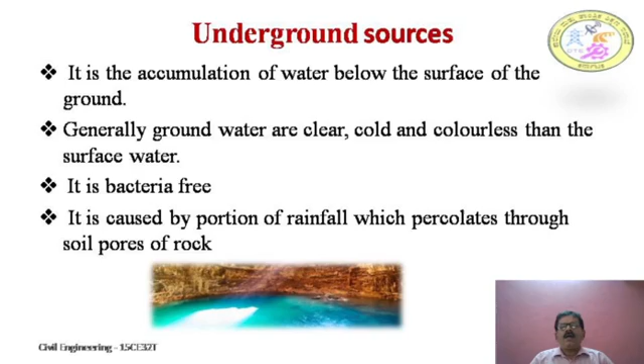Infiltration galleries. We know that groundwater travels towards lakes, rivers or streams. This traveling water can be intercepted by digging a trench or constructing a tunnel with holes on sides at right angles to the direction of flow of underground water.

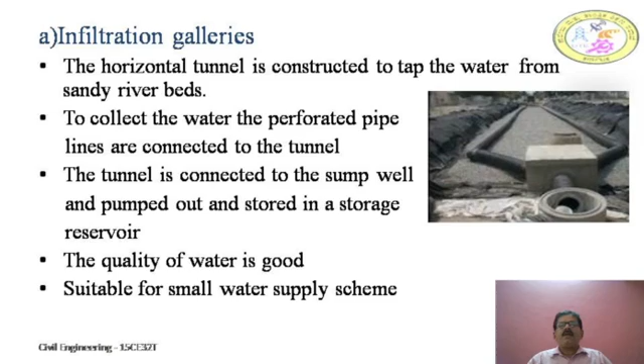For maximum yield, the galleries should be placed at the full depth of the aquifer. In this diagram, we can see the construction features of an infiltration gallery. Infiltration galleries may be constructed with masonry or concrete with weep holes of 5 cm to 10 cm.

Infiltration galleries are surrounded on sides and top with gravel or pebble stones to increase their intake capacity. A longitudinal slope is given to the galleries, and at the end a sump well is constructed. From the sump, collected water is pumped out and stored in a storage reservoir.

Here we can see the porous drains filled with loose material. Here water percolates and it goes to the infiltration gallery. The structure is constructed below the water table.

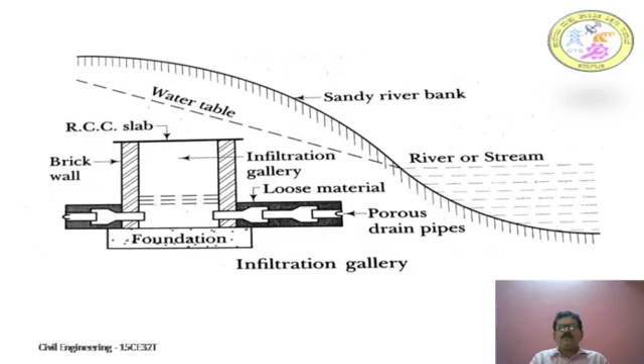Infiltration well. These are shallow wells constructed on the banks of rivers and nallas. These wells are very suitable for Indian conditions, where there are deposits of sand and porous material at least 3 meters deep in river beds. The water infiltrates through the bottom of these wells.

The water is tapped by a number of infiltration wells sunk in series in sandy river beds. The series of wells are connected to the jack well and from there pumped to the storage reservoir.

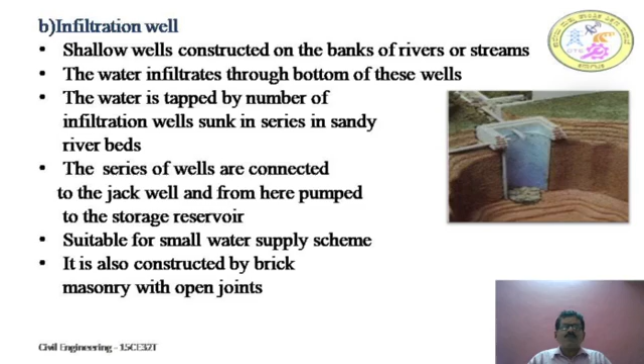This is the diagram of an infiltration well. This well is constructed by masonry wall with open joints. The top is covered by an RCC slab. The bottom is kept open to infiltrate the water

into the well. In the next diagram, you can see the porous pipes from infiltration wells connected to jack wells. From this jack well, the water is pumped out to the storage reservoir.

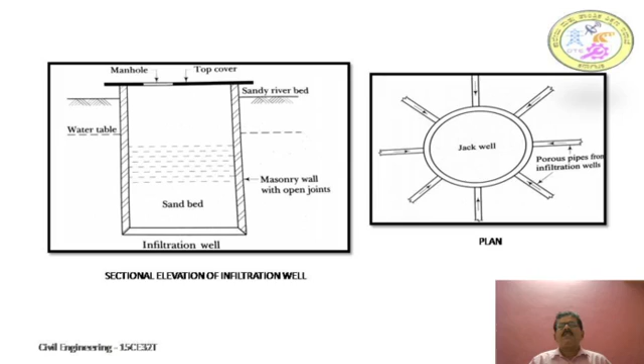Springs. Groundwater which reappears at the ground surface by percolation or underground pressure is called springs. Springs generally can supply a small quantity of water, hence these cannot be used as sources of water for big towns.

Well developed springs, when more numbers are combined together, can be used as water supply sources for small hill towns. The quality depends on geological formation as well as their locality.

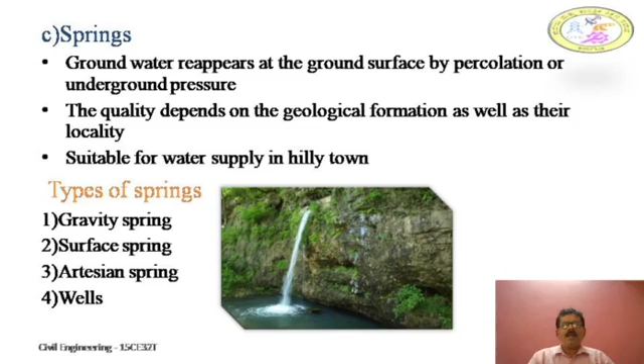Types of springs. First one is gravity spring, second one is surface spring, third one is artesian spring and wells. Gravity spring: the water table rises along the hill slope and water finds a path.

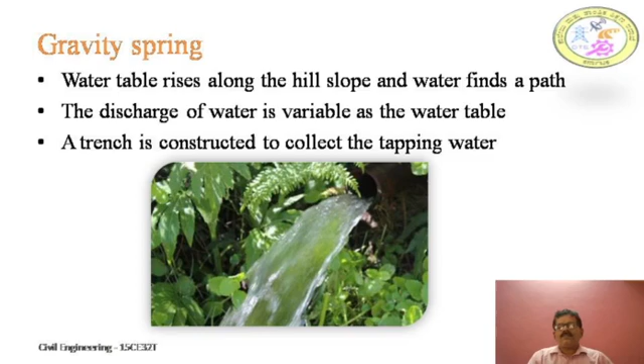Here we can see the diagram of gravity spring. The surface groundwater rises above the general level. This groundwater comes out from the weaker zone of the hill. The water from gravity spring is collected in trench.

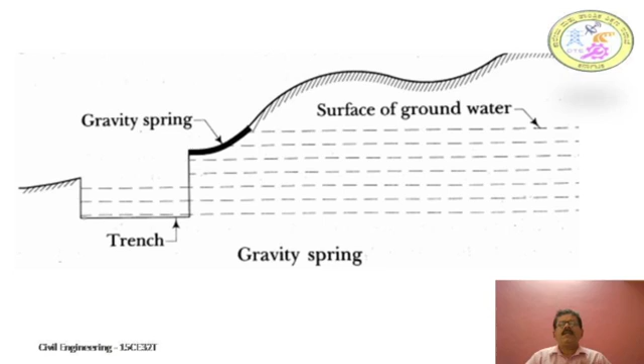Surface spring. It is the most common type of spring. This is formed when an impervious stratum which is supporting the groundwater reservoir outcrops, when subsoil water forms a storage due to the presence of an impervious layer in the form of a valley. A cut-off wall is constructed on the impervious layer to form a reservoir.

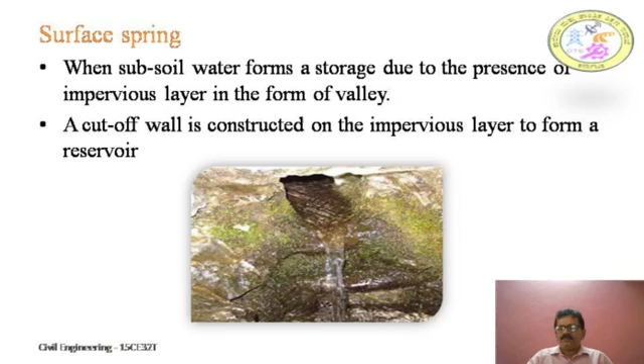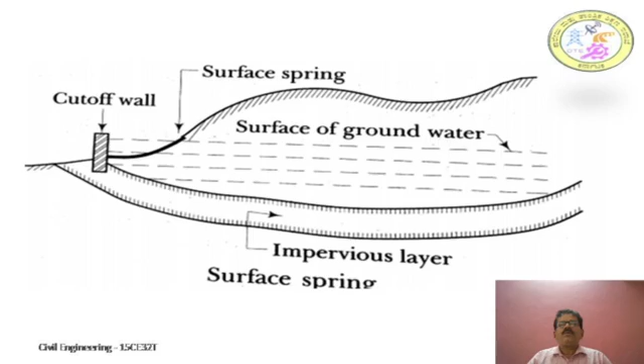In this diagram, we can see that surface groundwater is stored above the impervious layer. This groundwater comes out as a source of water. A cut-off wall is constructed to store the water.

Artesian spring. When the water-bearing stratum has too much hydraulic gradient and is closed between two impervious strata, such springs are formed. It is formed when two impervious strata enclose an aquifer or water-bearing stratum.

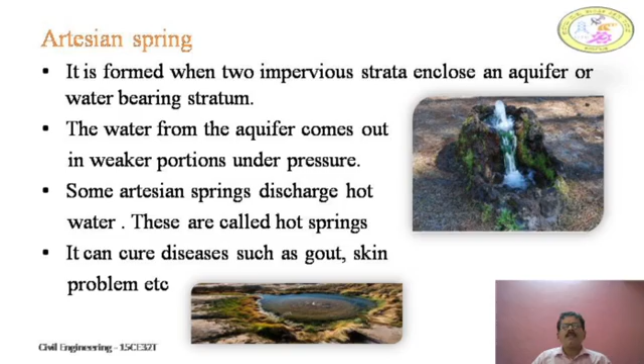Till now, in sources of water, we have studied surface sources and types of surface sources like river, stream, lake or pond and impounding reservoirs. Similarly, in underground sources, we have learnt about infiltration galleries, infiltration wells, springs and their types, and wells. Now we will see the questionnaire on this session.

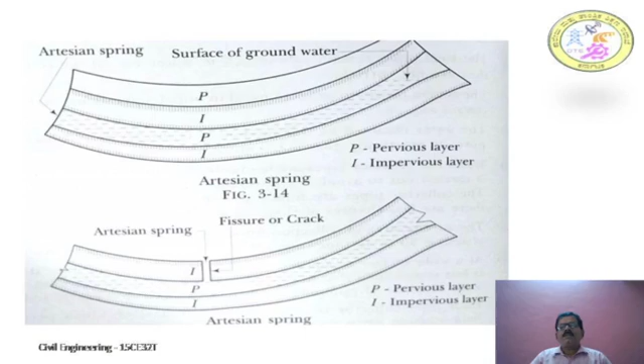Multiple choice questions. 1. The quantity of water available from an infiltration gallery depends upon dash. A. Size of gallery. B. Nature of soil. C. Yield of source. D. All of these. Answer D. All of these.

Second one. Water obtained from dash is generally known as underground water. A. Pond. B. Lake. C. Rivers. D. Wells. Answer D. Wells. Pond, lake and rivers are surface sources. Hence the answer is D. Wells.

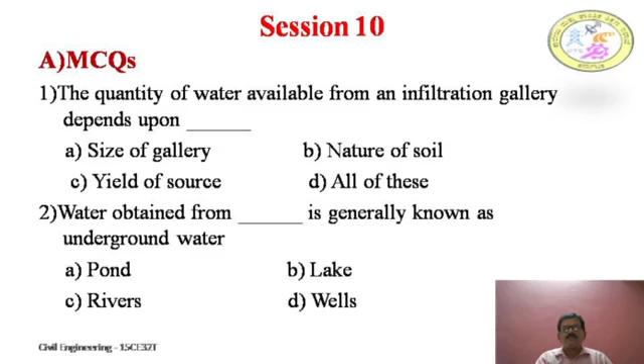Question number 3. Shallow horizontal tunnels constructed along the river on its bank to intercept groundwater are called dash. A. Canals. B. Infiltration galleries. C. Springs. D. Lakes. Here the answer is B. Infiltration galleries.

Question number 4. The continuous flow of water may be expected from dash. A. Surface spring. B. Artesian spring. C. Gravity spring. D. All of these. Here the answer is B. Artesian spring.